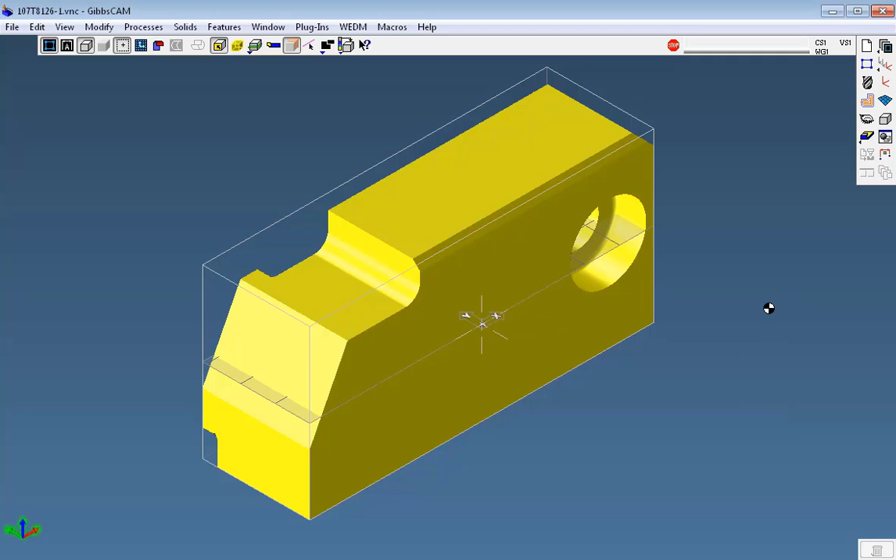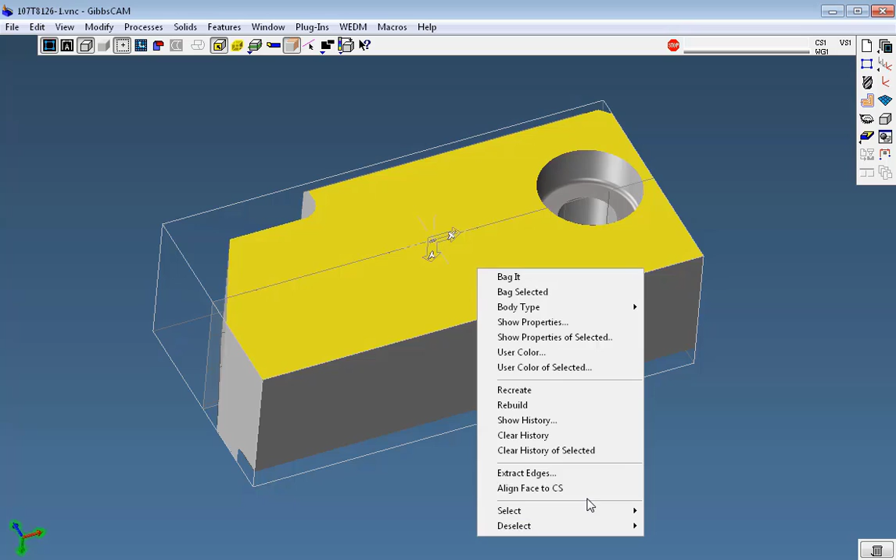So once I have accepted this, I notice that this part will probably be best done in two ops. So the first thing we always want to do is orient the part toward the first op. And let's say the first op will be on this face. So turning on face select, I right mouse click and align that face to my coordinate system, which in the 3-axis mill is going to be

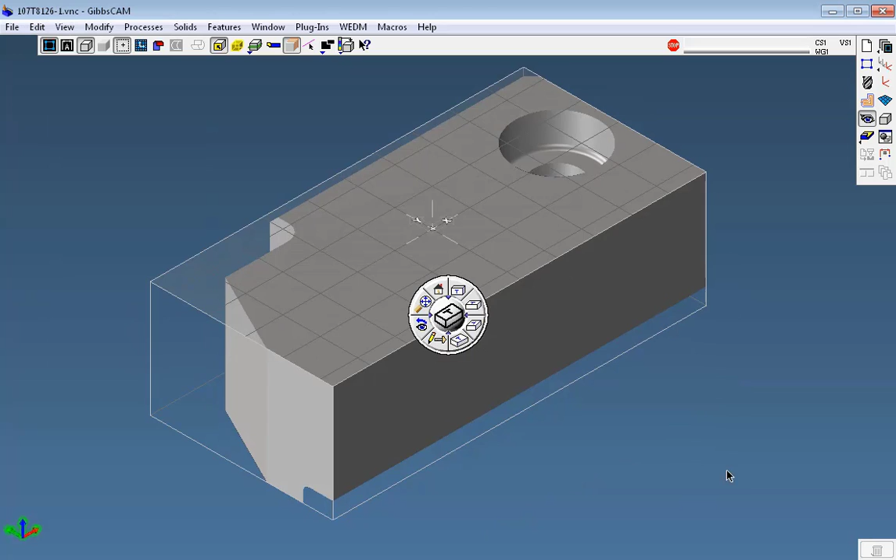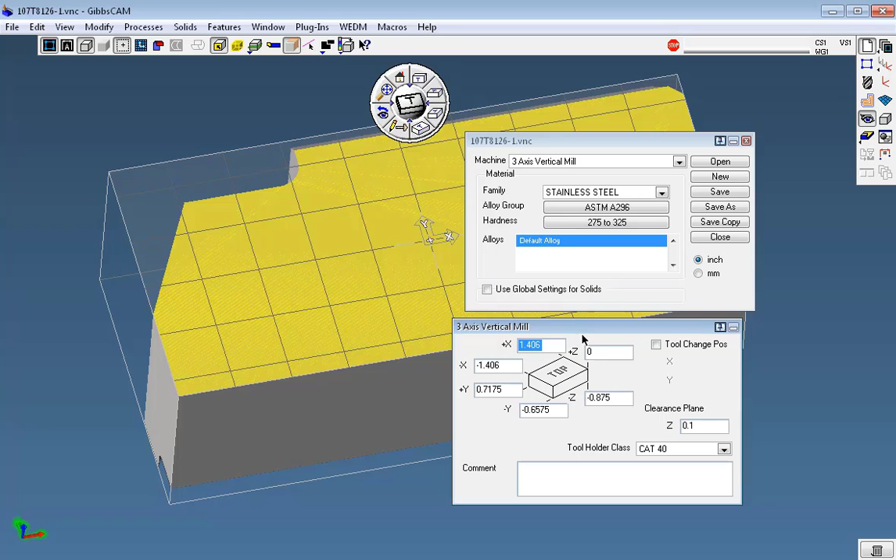the XY plane. Once it's there, I like to go to an ISO view and shrink wrap my stock. That's under view, shrink wrap. Now that's the minimum stock that we are going to need to cut this part. Now we have a choice to add some stock. I'm going to bring in my stock document, and I will say that on this side I want the corner actually to be up in the upper left because I want to put this in a vise.

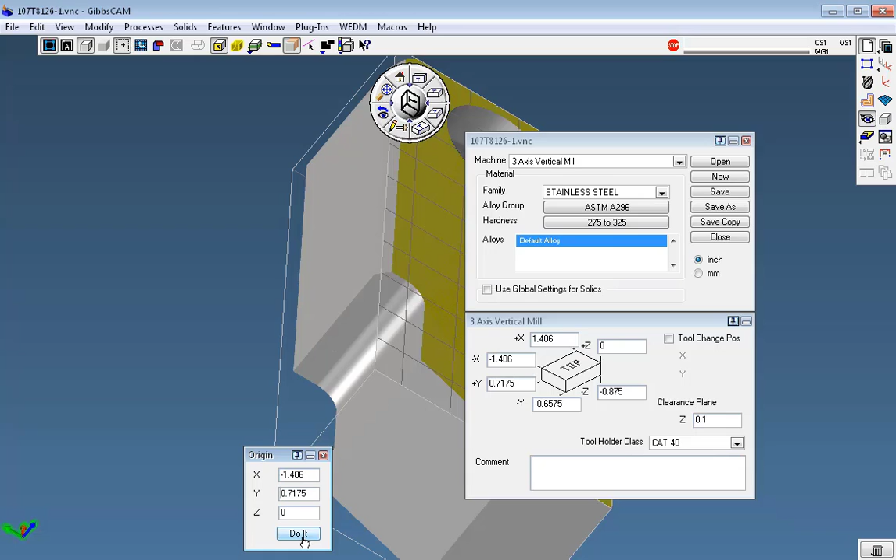So the next thing I would do is move the part origin, and I want the part origin to be, in X, with my Alt key, I'll pick that edge, and then Y I want it to be this edge. My Z has already been selected by the right mouse click, align to CS. Now let's put the origin at the top. I want to leave that there, but I do want to add some stock.

Let's say on the X side I want to add minus another 100 thousandths. Y I want to keep that 0. Let's say that's a flat stock already made. And let's say this part is 1.5 inch thick. And I've checked my clearance plane, which is okay. My Z I want to face off 40 thousandths to clean it up. And on my Y negative I have 1.5 inch stock.

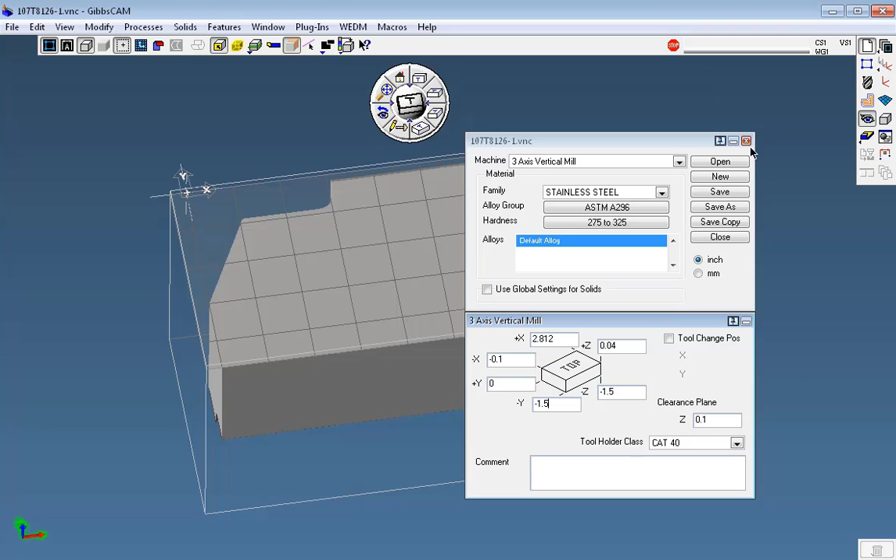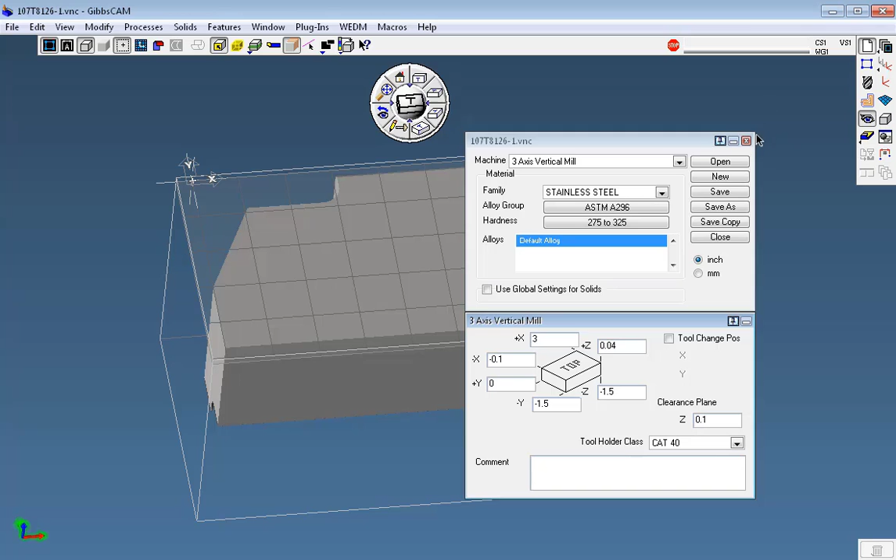So what I've just done, if we look at this on a top view, I've added stock on 3 sides. I have to add the stock to the X side. So on the X plus, I'm going to make that a 3-inch piece of stock. I'll just type that in. So now my stock is representative of the part going into the vise. That's the first thing I do, is get the part aligned with my origin, where I want it, the extra stock put around it, and there we go.

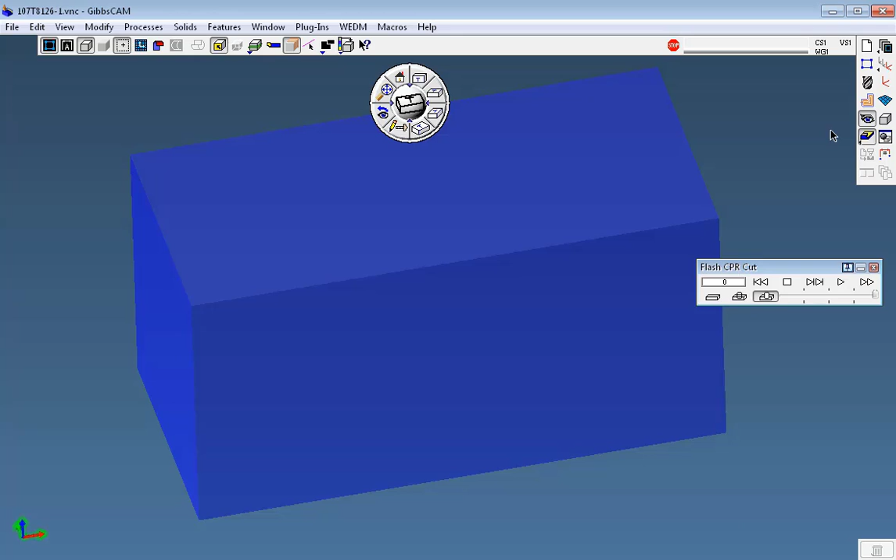I can verify this a couple of ways. One would be to go to Flash CPR and turn on transparent stock, which I have. Now to see the part in the stock, I have to highlight any part of it or all of it, and then when I hit my Flash CPR I will see my part as it will be in the stock. So that's the end of this movie segment. I now have my part correctly aligned and ready to do the first op.